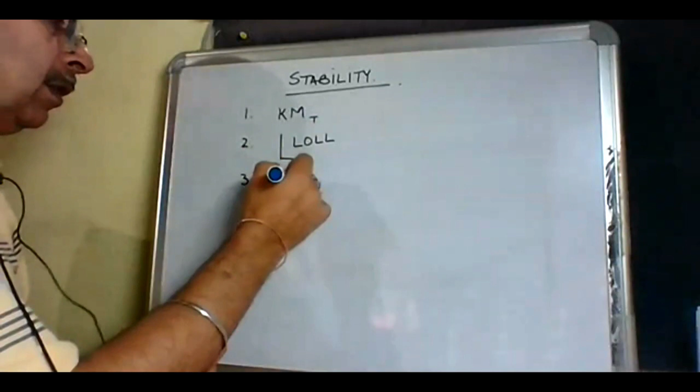In stability topics: one is KMT, second is angle of loll, and third is Simpson's rules. These are the three major topics we will be covering during this month.

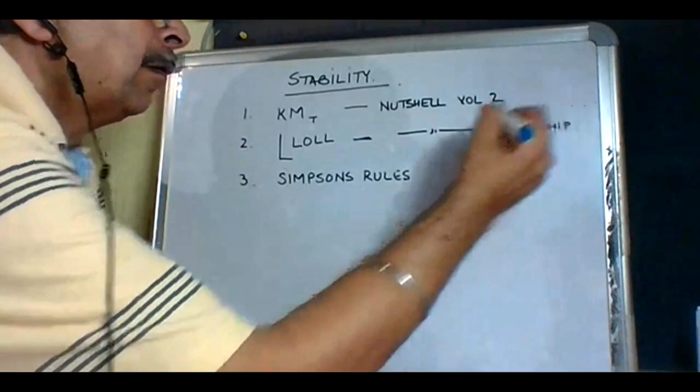This we will be doing from Captain Subramaniam's Nutshell series, Volume 2. That is Captain Subramaniam's. This we'll be doing from Nutshell Volume 2, and H/Ship. And this we will be doing from only Nutshell Volume 2.

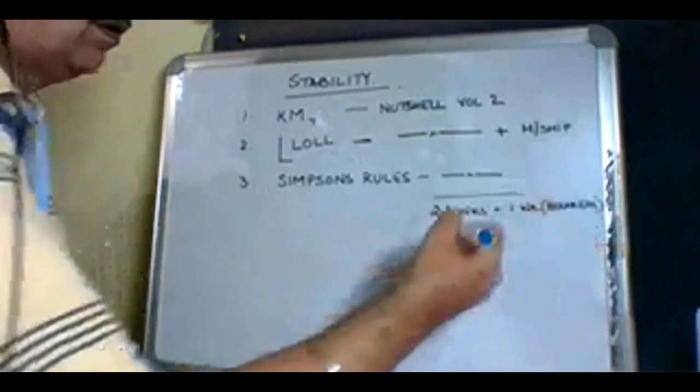The total time that we will take for doing all this is going to be roughly 2.5 weeks. And the balance, 1.5 weeks or 1 week, we'll be doing the bouncers from past papers, etc. The bouncer questions. So that is going to be our breakup of the duration: 2.5 weeks plus 1 week for bouncers.

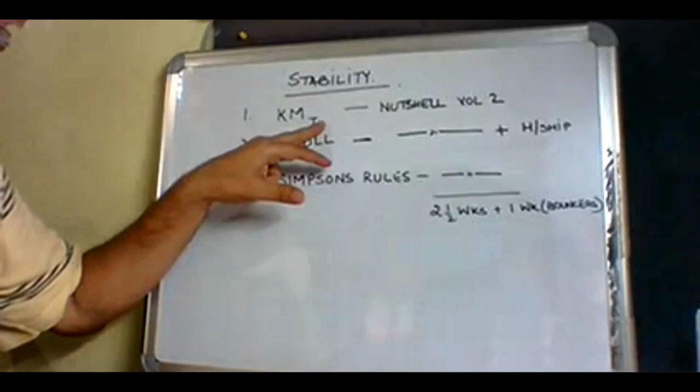So we are going to be starting off with Nutshell KMT. We're starting off with this first.

Okay, so I'm basically on Volume 2 of my book. In my book, it is chapter 19. I don't know if you've got the same book or not, mine is the old edition. This is the book I'm talking about, the green colored book, this is the old edition. I don't know if you have the new one. So of this book, I'm talking about the first chapter—sorry, chapter 19, my mistake. Chapter 19, and the title is Calculation of BM and KM.

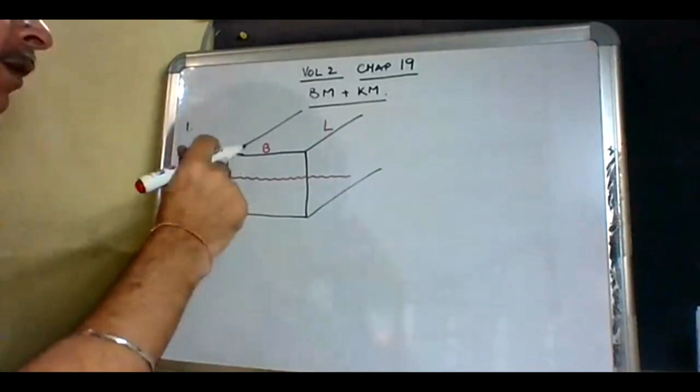Okay, so couple of formulas from this particular chapter. So supposing we have a rectangular box-shaped vessel, and this is floating in water. Length of the vessel is L, breadth of the vessel is B, and the draft of the vessel is D. I'll make it small l, small b, and small d. This is, of course, the keel.

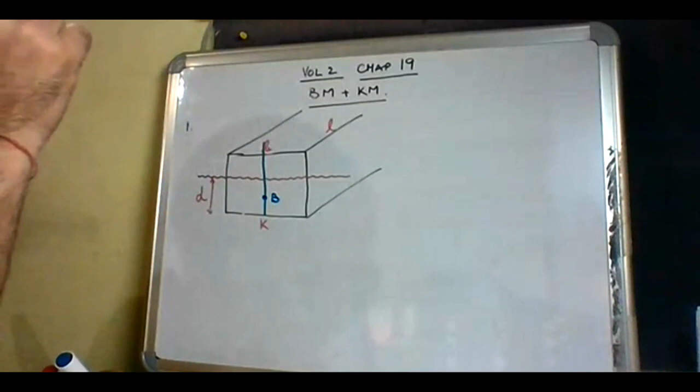Then this is the vertical center line, through the center line, the vertical. Then the center of buoyancy, capital B, will be at a draft D by 2. So KB is equal to D by 2.

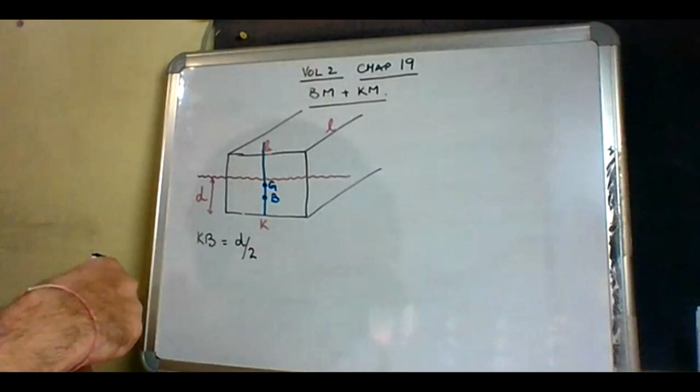Then the center of gravity would lie somewhere above the center of buoyancy. So let's say the center of gravity lies over here. And this vessel—so this be the vertical, this is the keel, this is the buoyancy, this is the gravity. Now this is the waterline.

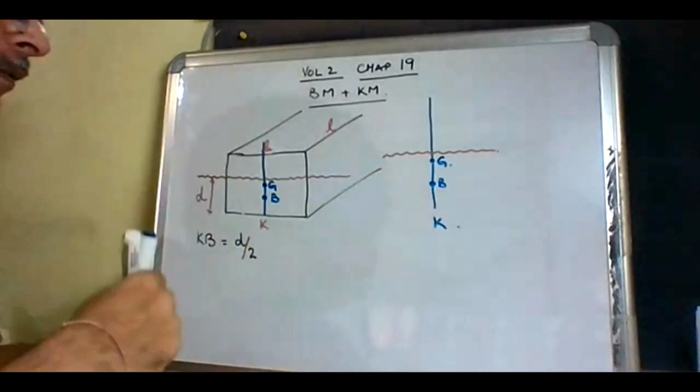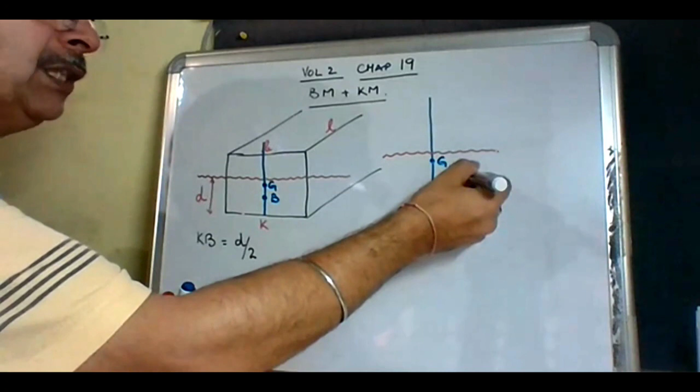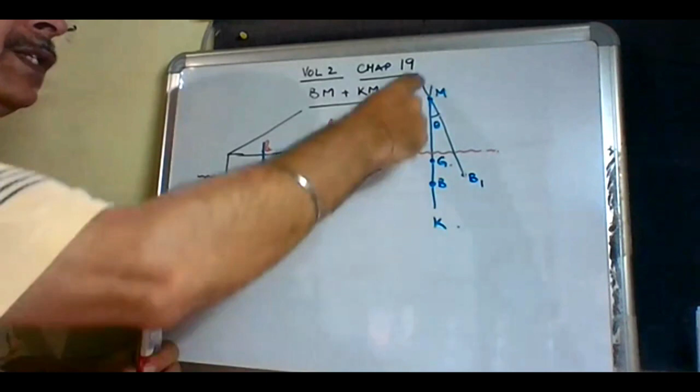So how do you define the metacenter? It's an imaginary point above the vessel where the two verticals drawn through the center of buoyancy in the upright condition and the center of buoyancy in the heeled condition meet. That point is called as metacenter. Since the axis in question is called the transverse axis, therefore this metacenter is called MT, transverse metacenter.

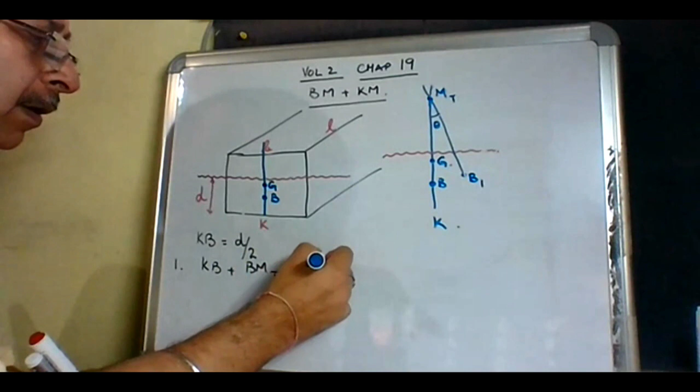So therefore, that gives us our first formula: KB plus BMT is equal to KMT. KB is the distance between keel and center of buoyancy. BMT is the distance between center of buoyancy and transverse metacenter. KMT is the distance between keel and transverse metacenter.

Similarly, KG plus GMT is also equal to KMT. That is, therefore, KB plus BMT is equal to KG plus GMT.

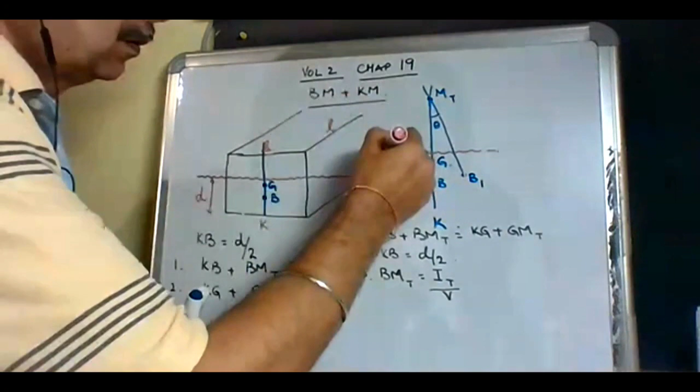Moment of inertia of a rectangular water plane. The water plane is rectangular. This is the water plane, this slice. It's a rectangle whose length is L, whose breadth is B.

IT is nothing but LB cubed by 12 for a rectangle. LB cubed by 12.

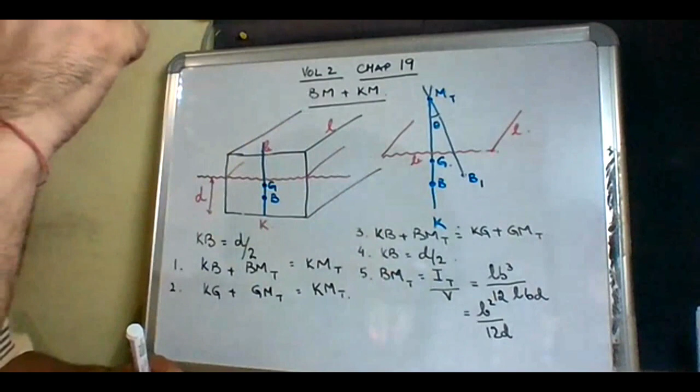Volume is the underwater volume, is nothing but LBD. And so therefore, if you cut out, the shortcut becomes B square by 12D. So BMT is B square by 12D. And so therefore you can find out the value of KMT. KB plus BMT will give you KMT.

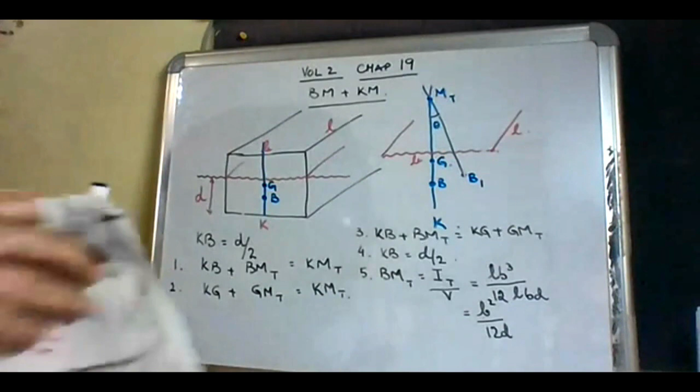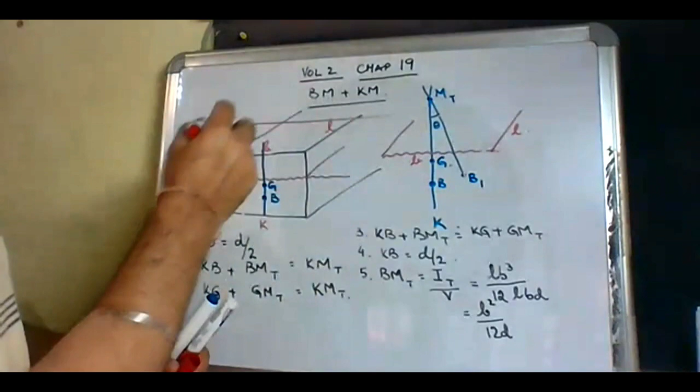There is one more axis, called the longitudinal axis. This is the axis - the one which is parallel to the breadth. If I were to show this as a top view, a bird's eye view: this is forward, this is aft, this is port, this is starboard. This is L, this is breadth.

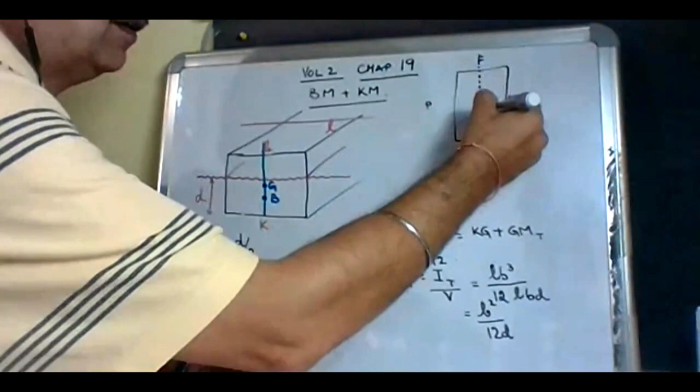So far what I have shown you is this axis, running fore and aft, the transverse axis. This is the same axis. This is transverse axis, this axis is the same. Now I am talking about this axis. This is the longitudinal axis, the axis which is parallel to the breadth of the vessel.

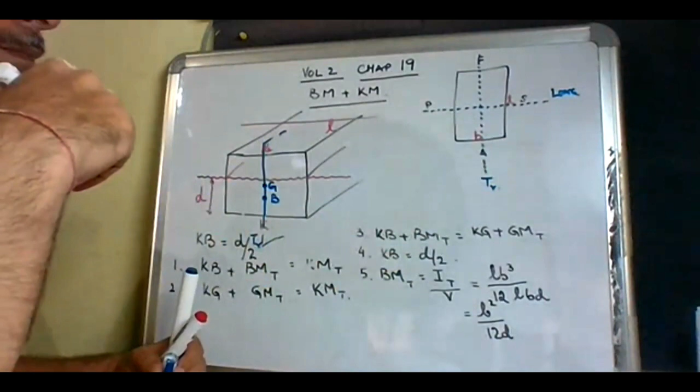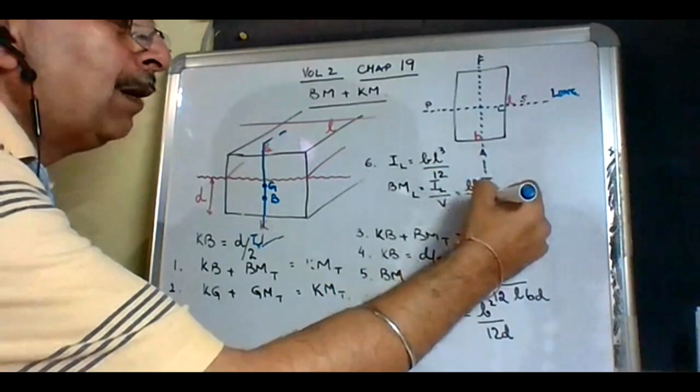This will give me IL. The side which is parallel to the axis, B, powered as 1. The side which is perpendicular to the axis, small l, BL cube by 12. This is IL, I longitudinal. And so therefore I will get BML. IL by V will give me BL cube by 12 LBD, and therefore shortcut L square by 12D. So BMT is B square by 12D, BML is L square by 12D.

And that leads me to the first three formulas. KB plus BML will give me KML. Second formula, KG plus GML is equal to KML. Therefore, third formula, KB plus BML is equal to KG plus GML. So formulas number 1, 2, and 3 get modified now - it could be transverse, it could be longitudinal.

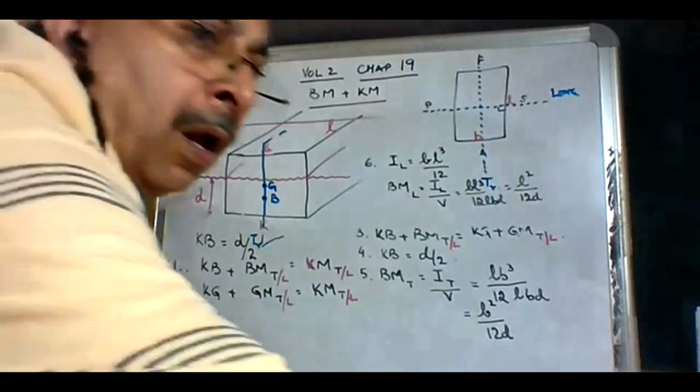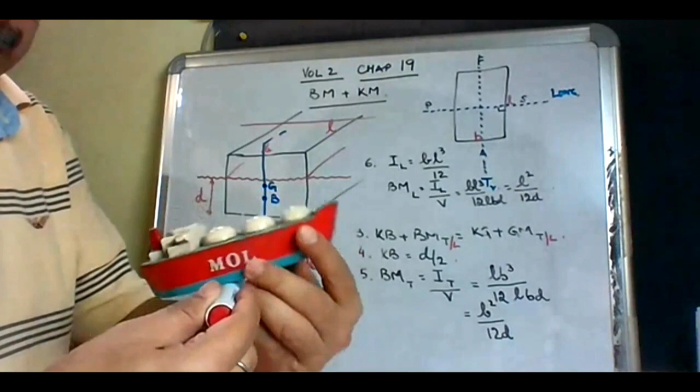This axis about which a ship is going to roll is the transverse axis, so the rolling axis. The other is the pitching axis, the axis about which the ship will pitch - that is the pitching axis. So whatever pitches about it, or change of trim happens about this axis, that is called longitudinal. Its BML is L square by 12D, and BMT is B square by 12D.

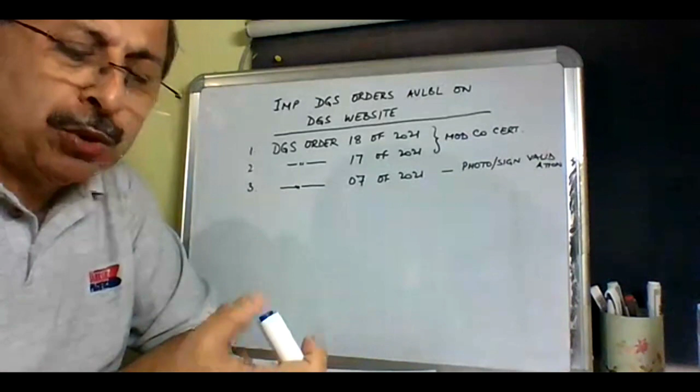Then this is a DGS order, very, very important for you, from 07 of 2021. This is with regards to validation of your photograph and signature. Very, very important for you. If your photograph and signature on the DGS website is not updated, latest and validated, you will not be allowed to do any course, or if you do the course, the certificate will not be issued. So it's very important for you guys, especially the May batch, which has just signed off from the ship and come. Please make sure that your photograph and signature is the latest.

So therefore you read this and you'll get to know how to generate a link. Once you generate a link, then you can change it. The older guys must already be aware of it, I'm assuming that.

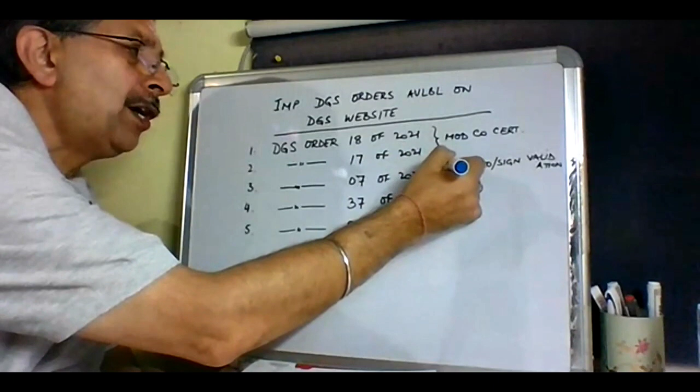Then DGS order 37 of 2020 and DGS order 27 of 2020. These are from last year, but they are very good from an information point of view, showing how the progress has been made. So please read these, and especially comply with this one. This requires your intervention; the rest does not.

So please go ahead, and if you have not done it as yet, then do it today, top urgent. Just to let you know, last week I had to remove one chap from another batch because he had not validated his photograph. So he had to be removed from the batch and he's been pushed to the June batch. Just to let you know that.

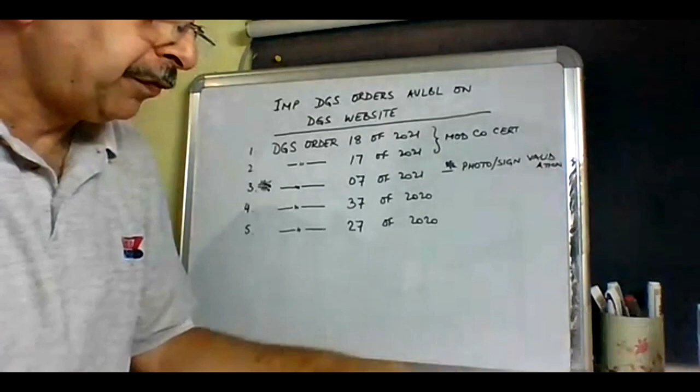So, all right, coming back to where we were yesterday. Yesterday we did the formulas. Can I erase it? Yes, sir, okay, yes, sir. So yesterday we did the formulas, we're coming on to the numericals now.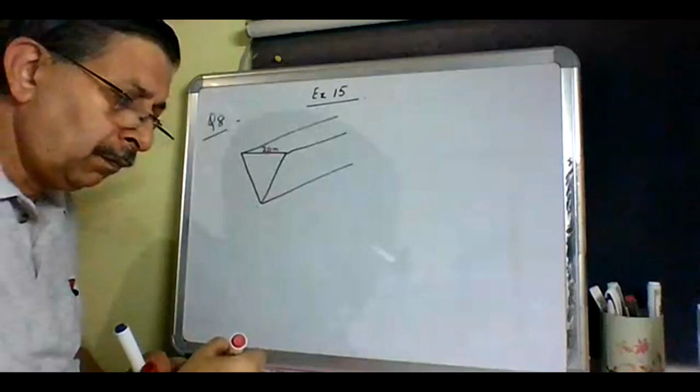And this barge is 20 meters broad at the top and 10 meters deep. It is 45 meters long. And it displaces, the displacement is 2952 tons. We have to find out the KM in salt water.

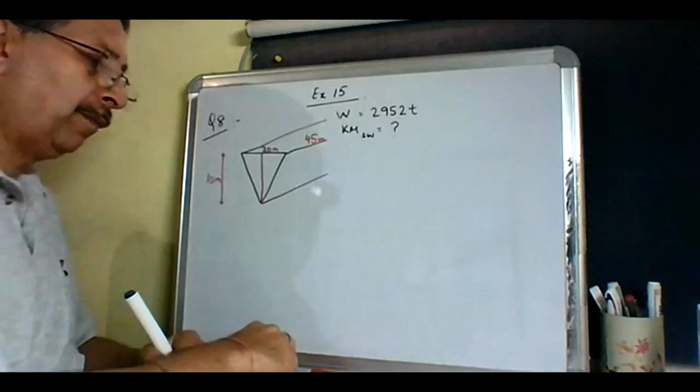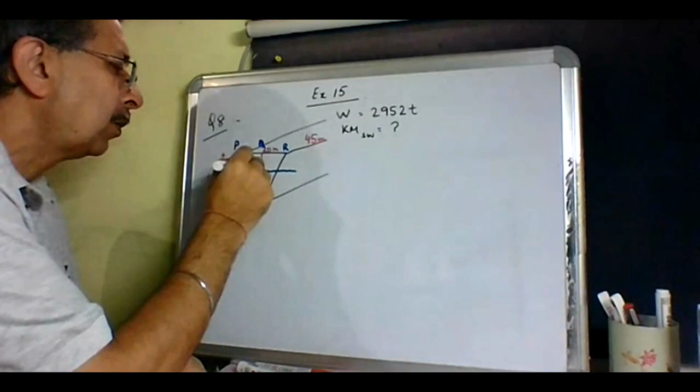So therefore, let us say this is floating at this draft. This is the water line. So this is the draft. This is the keel. So let's give some names: P, Q, R, S, T, U.

So our first job is basically to find KM. KB plus BMT is equal to KMT. KB... excuse me sir, yes please.

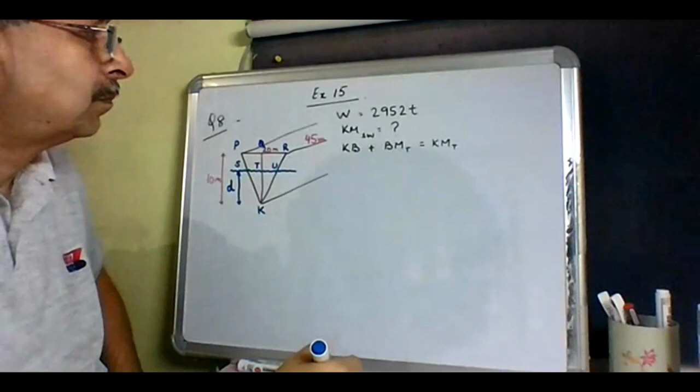KB is the geometric center of the underwater volume, the underwater shape. This will be the center of buoyancy. So KB of a triangular portion is 2 by 3 from apex, 1 by 3 from base. So KB will be 2 by 3 D.

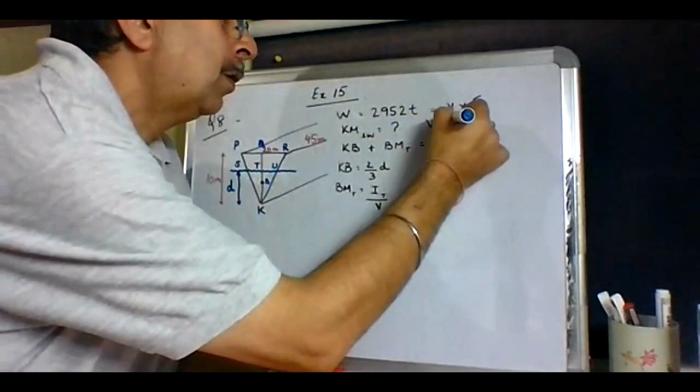Now we come to BMT. BMT is IT by V. So we need the volume. Let's go back to our displacement. Displacement is volume into density. So volume will be 2952 divided by 1.025.

Water plane is SU. So this is the water plane, this is SU, it's a rectangular water plane where the axis is going like this - this is the transverse axis, which is going through like this. The length of the water plane is L and the breadth of the water plane is SU, that's the breadth.

Since it's a rectangular water plane, IT will be LB cube upon 12, where B is the breadth at the water plane, B WP.

So I need the breadth at the water plane. Let's go back to this thing. In this triangle, KPR is similar to the chota triangle KSU. The big triangle is similar to the small triangle.

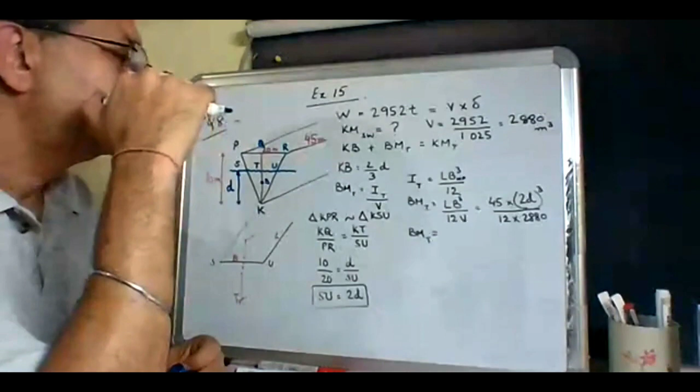Point 01042 D cube. Point 01042. 0.01042 D cube. That means my KB has a component of D. My BMT has a component of D.

That means I need a value for D. How do I get it? How do I get D? Okay, by the volume, sir. Absolutely right. So I've got a value for the volume.

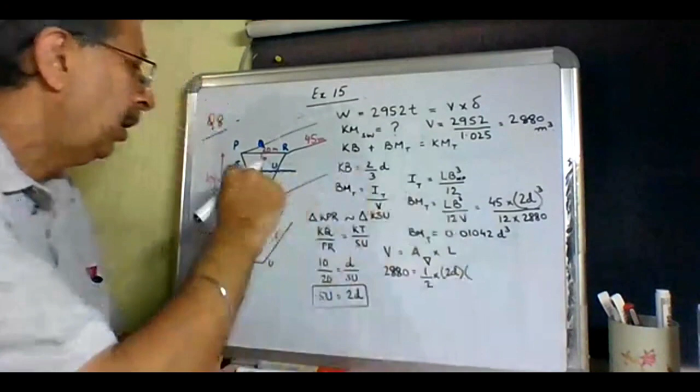Volume, underwater volume, is equal to area of the triangle into the length. So 2880, area of the triangle, half into base, that is SU, 2D, into height, that is D, into length, 45. Solve for D.

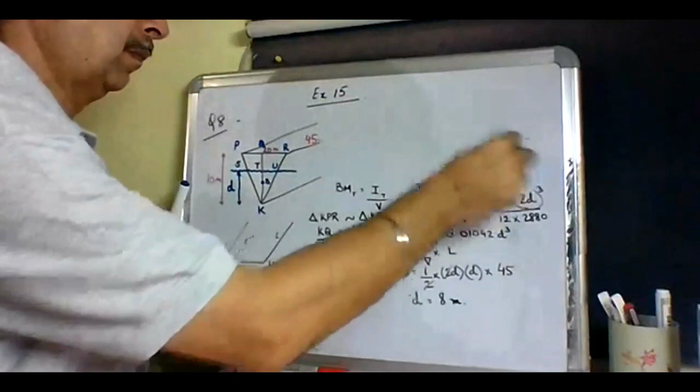Two cancels. 8. D is 8. So D is 8. So KB is 2 by 3 of 8.

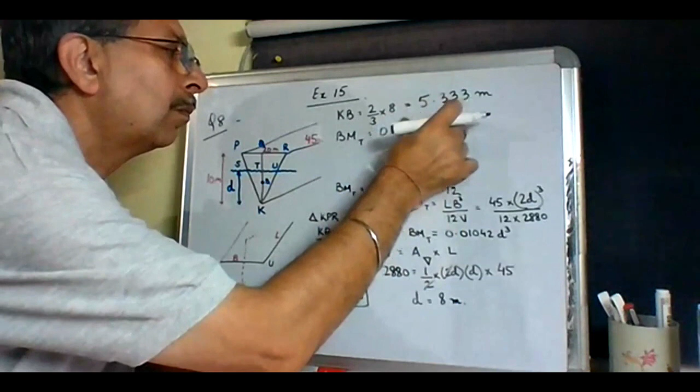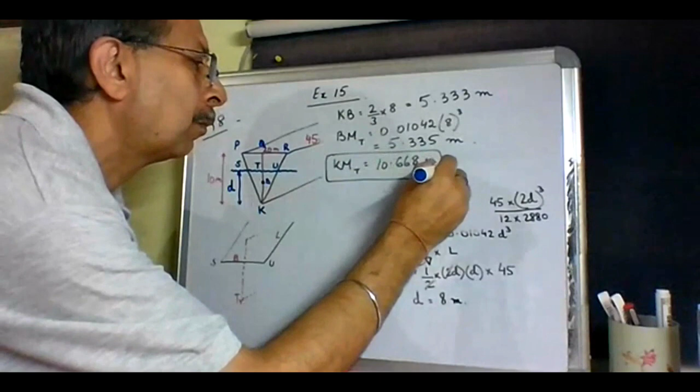Five point three. 5.333. BMT. Five point 335. Add the two. KMT will be KB plus BMT.

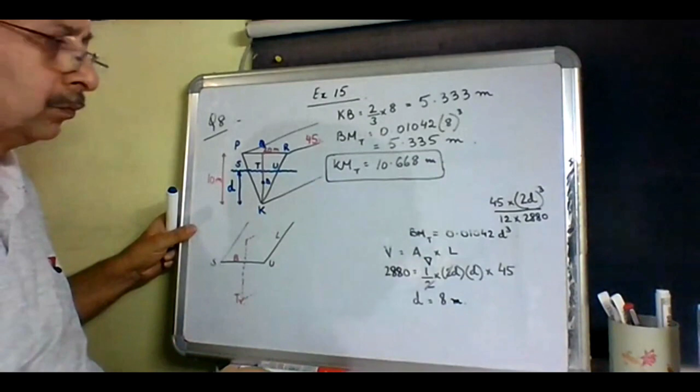Okay, coming on to combination of two shapes. So we're on question number 11. This is about combination of two shapes. So please mute yourself.

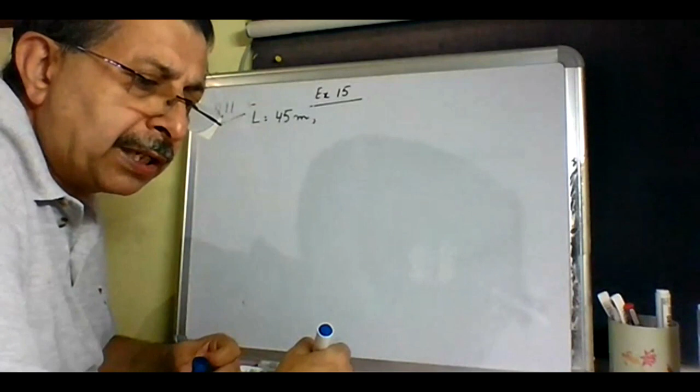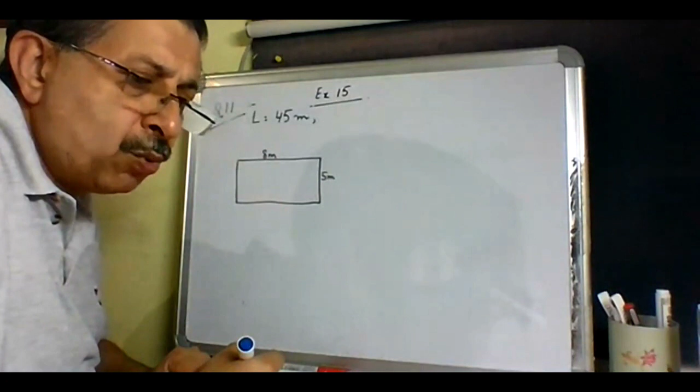Question number 11. A barge is 45 meters long, so length of the barge is 45 meters. And she has a uniform transverse cross section throughout, consisting of a rectangle above a triangle. So rectangle is 8 by 5. We have a rectangle, eight, 5. And below this is a triangle, apex downward, 8 by 3. So this is the base of the triangle, and this is 3.

Yes, sir, this is Tripurari Shukla, sir. I'm unable to see your video. What happened? Sir, your video isn't coming, sir, just a file is coming. What about the others? Are you able to see my video? Yes, sir. Yes, sir. Yes, sir. So what you can do, Tripurari, is just log out and leave the classroom and then try to log in again. Okay, sir. Yes, sir. Now, okay.

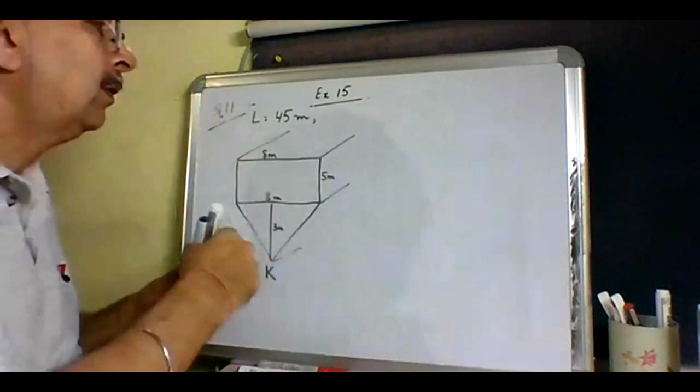So the question is saying the triangle is apex downwards, 8 by 3. The displacement W is 1620 tons. Find the KM in fresh water.

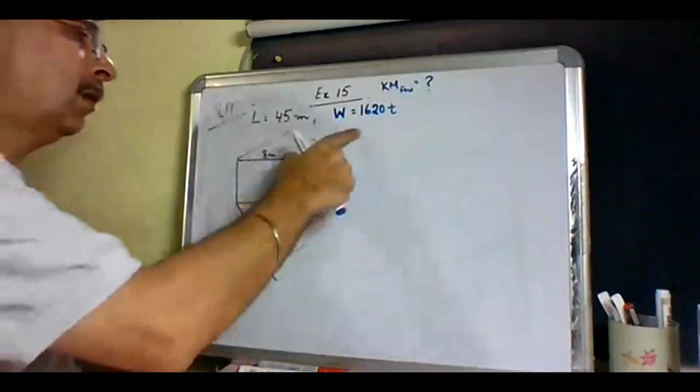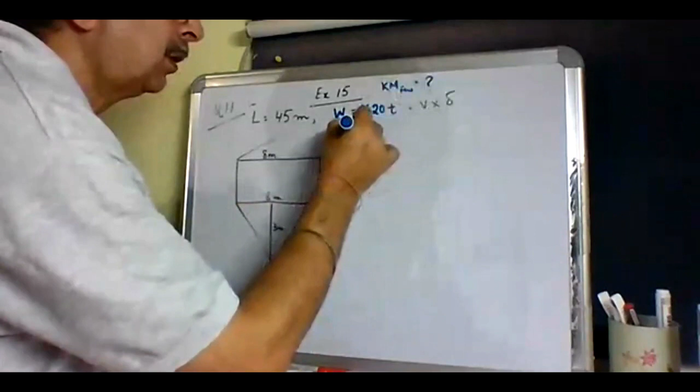Okay, now this is a combination of two shapes. I don't know where the water line is - what is the draft, I don't know. So I'll find out from this. Displacement is equal to volume into density. Since it's fresh water, volume will be equal to so many cubes. This is the underwater volume that I have.

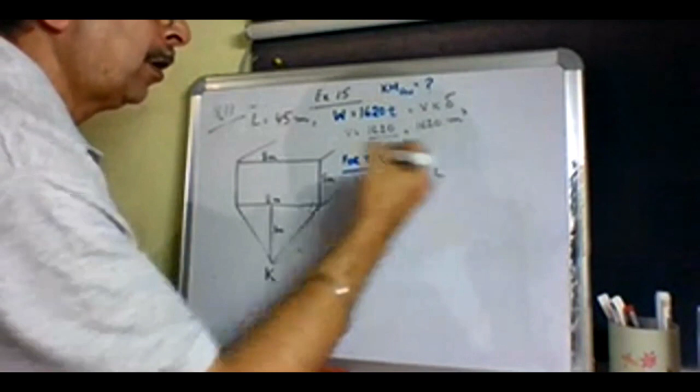Now let us find out the volume of the triangle. So, for the triangular portion, volume of the triangle will be area of the triangle into the length. Area of the triangle will be half into base into height into the length. How much is this? 540. 540.

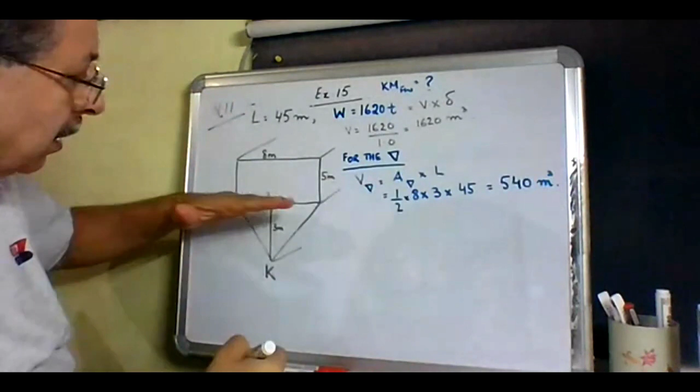Since the volume of the triangle is less than the volume of the full shape, that is 540 is less than 1620 - therefore the waterline is in the rectangle. Is this okay with everybody?

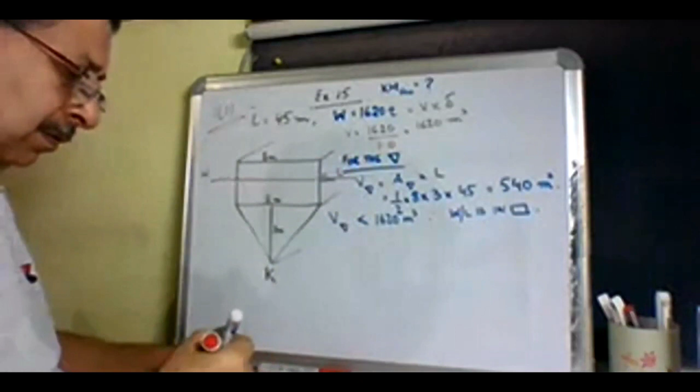That means it's coming here, this is the water line, in the rectangle. Therefore, the volume of the rectangle is equal to the volume of the whole shape minus the volume of the triangle.

How much is this? 1080. Is this okay with everybody? Yes, sir. So this is the volume of the rectangle alone, the underwater portion of the volume.

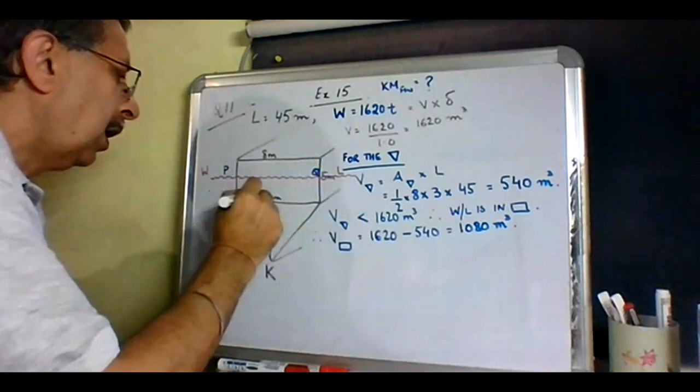Let's give some names now: P, Q, R, S, T.

So the volume of the rectangular portion is 1080. I want the height of the rectangle alone. So the volume of the rectangle will be equal to the area of the rectangle into the length. Area of the rectangle will be 8 multiplied by the height, let's call this h, into 45, and this is equal to 1080. Solve for h.

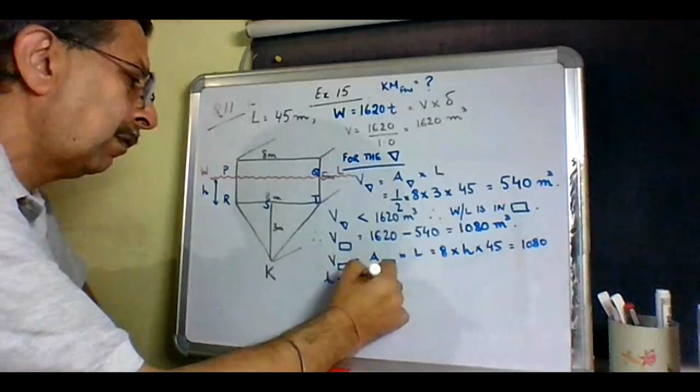3 meters. How much? Same, 3 meters. So this is 3 meters.

Now I need to find out the KB of the combined shape. So KB of the combined shape, because KM is equal to KB plus BM. So for the combined shape...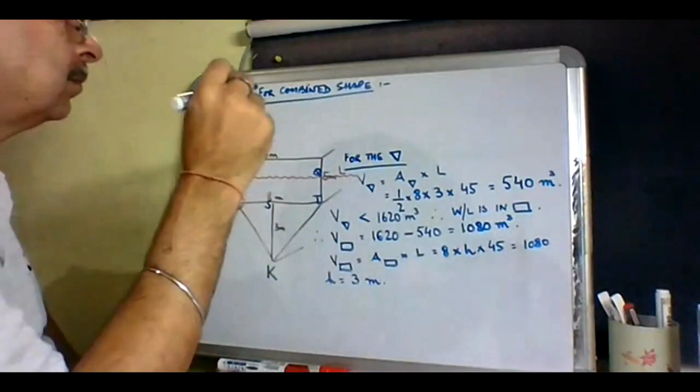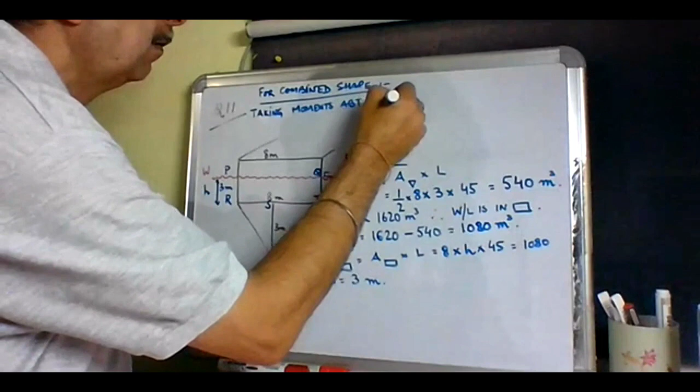I've got two shapes: a rectangle and a triangle. So I have to find out the KB of the combined shape. That we take by taking moments, and we take moments about the keel. So how do we take the moments?

Basically V1 into lever 1 plus V2 into lever 2 is equal to total V into the total lever, which is KB.

Let V1 be our triangle, so volume of the triangle is 540, into lever of the triangle, that will be 2 by 3 of D. This is 2 by 3 of 3, which is... sorry, which is 2. Is this okay with everybody? Yes, sir. So this is the lever, calling it Bravo 1. So 2 meters.

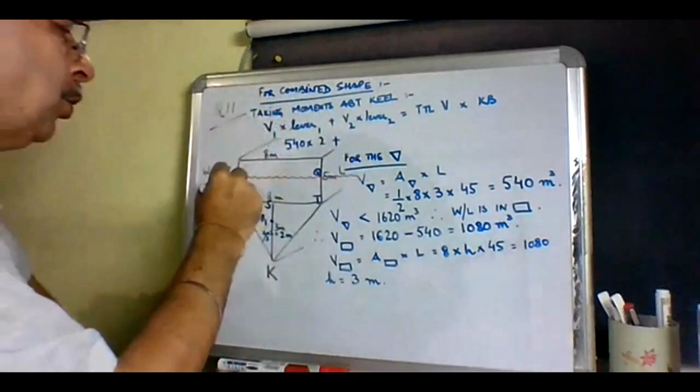Plus volume 2 is the rectangular portion, that is 1080. Lever of that, the geometric center B2 of this will be 1.5 meters from here, but from keel this will be 3 plus 1.5. Is this okay with everybody? Yes, sir. The distance of B2, that is KB2 I want, is 3 plus 1.5, which is 4.5.

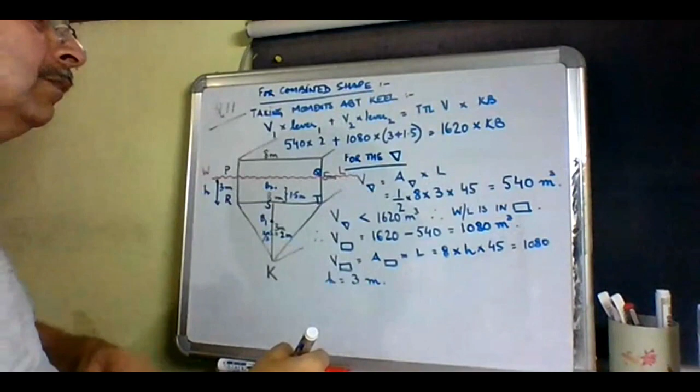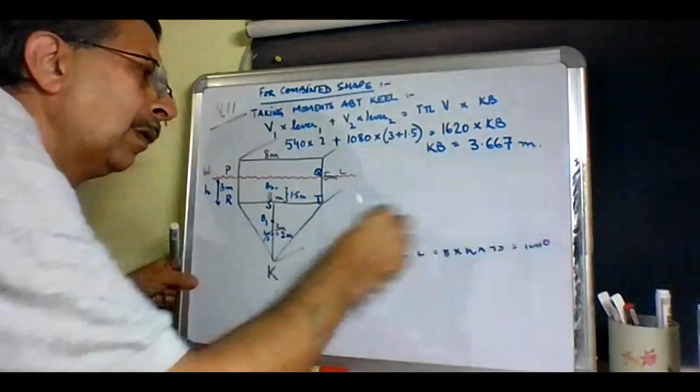This is equal to total volume, which is 1620, into KB total. So tell me the value of KB. Three point six... 3.667. Is that correct? Yes sir, it's correct, 3.6.

Okay. Sir, can you please tell once again about lever 1, how you did lever 1?

So basically what I'm doing is V1 into KB1 plus V2 into KB2 is equal to total V into KB. KB1 is 2 by 3 of the geometric center of a triangle, which is 2 by 3 from apex, 1 by 3 from base. So 2 by 3 of 3 is 2 meters. KB2 will be 3 plus 1.5. These are the two levers. Okay.

BMT is IT by V. So V we already know, 1620.

IT, rectangular water plane, this is a rectangle, the slice of PQ. So LB cube by 12.

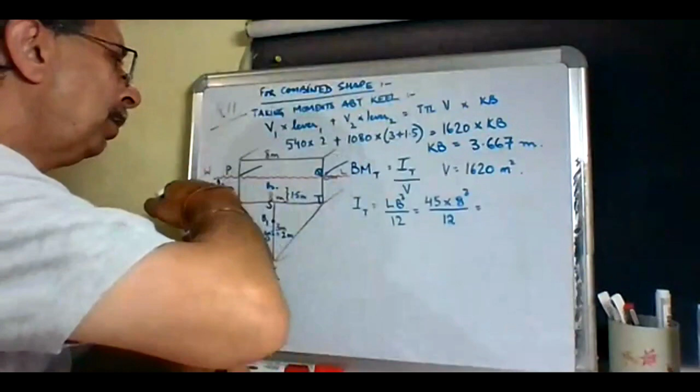45 into breadth 8 cube divided by 12 - this is the slice, the PQ slice we're discussing. 45 into 8 cube divided by 12 equals 1920.

M4. So BMT is 1920 M4 divided by 1620 M cube.

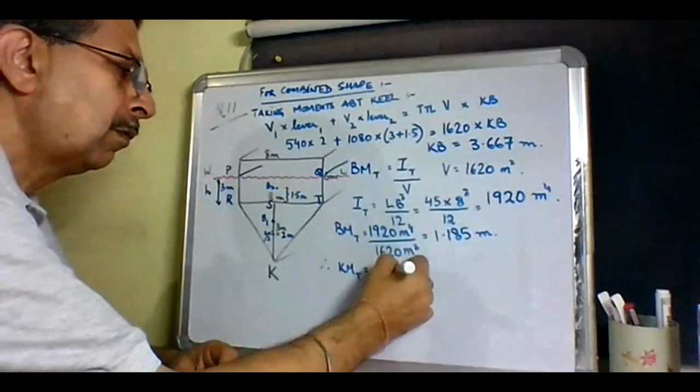1.185. So this is your answer, 4.85.

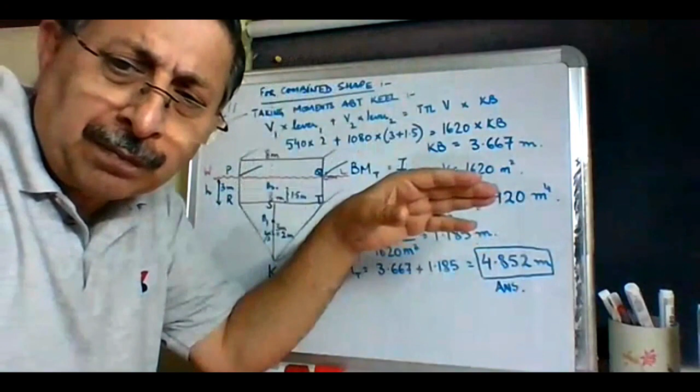So what I want you to do is practice the remaining questions of this exercise. There are a total of 15 questions given. You can practice up to 14. Leave the 15th question for now, I'll do that later.

After I finish the next chapter, I'll come back to question number 15. So leave question number 15 aside.

Do questions 1 to 14 now, all of them. You should be able to do them - we have done the toughest questions. These were the toughest, so whatever remains is easier than this.

So using the same mechanisms and principles, you now solve them. If there are two shapes, any shape can be there, right? You will follow the same formula, taking moments about keel.

Same formula: V1 into KB1 plus V2 into KB2 is equal to total V into KB. And then you should be able to solve it.